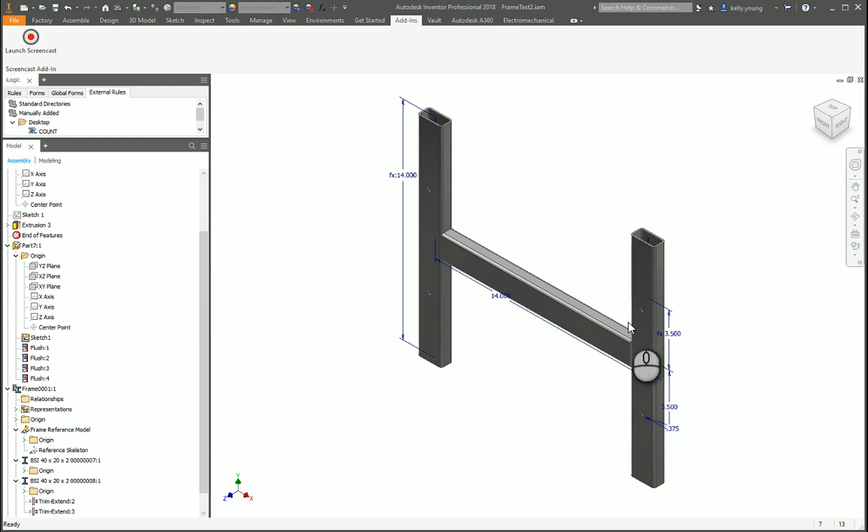So the question we have today is how to get the frame holes here to stick when we change the material from a different frame generator to a different style.

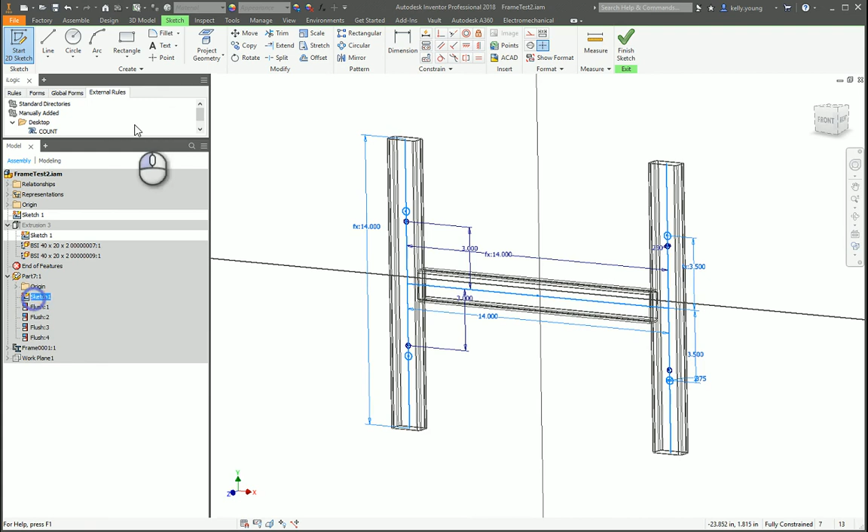First off, for the extrusions themselves, set up a sketch. Now, when you actually go into it and look at the wireframe, if you project the geometry of your sketch here... well, that's not working right there. Let's see.

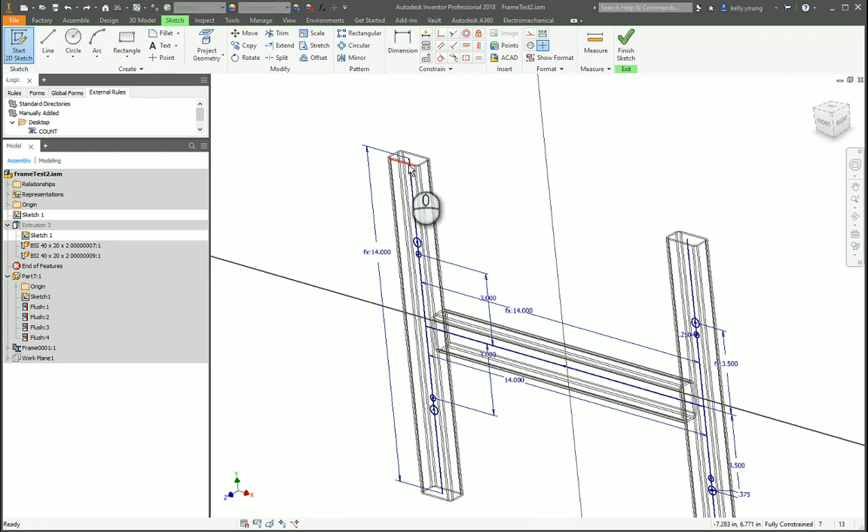There we go. It basically comes in as a locked part, not a projected part, because it doesn't really come through like that. So what I did is I drew a line that basically covers the exact same shape and set this dimension to a linked parameter to that part 7 here.

So that way, whenever it changes, this will change. That way we can attach our holes that we want to it.

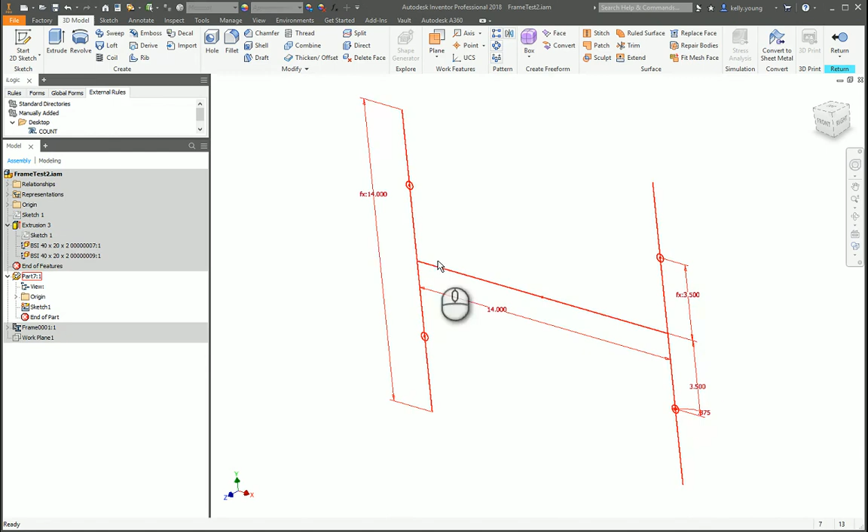So if you actually look at part 7, I was trying this earlier to see if these could come through, and they did not. So we'll just go ahead and actually delete these out.

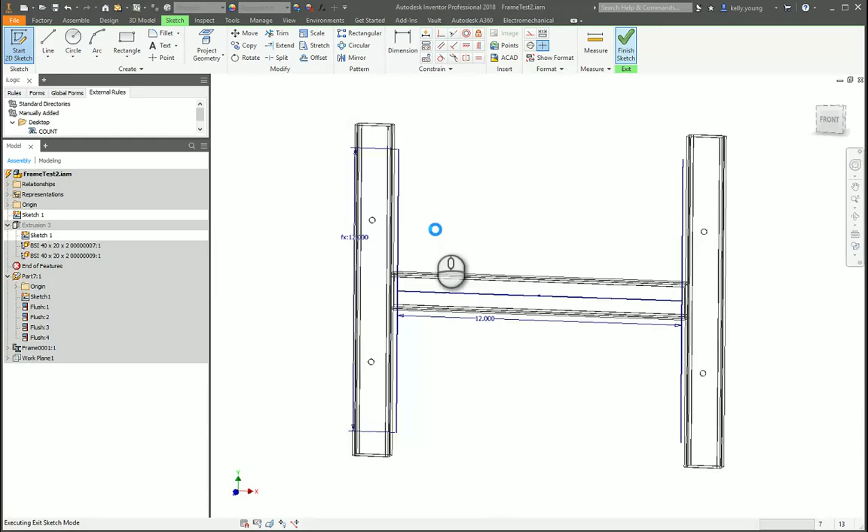So these are linked to this dimension. Rebuild all.

And the hole sticks. So make that shorter. The holes will stay there.

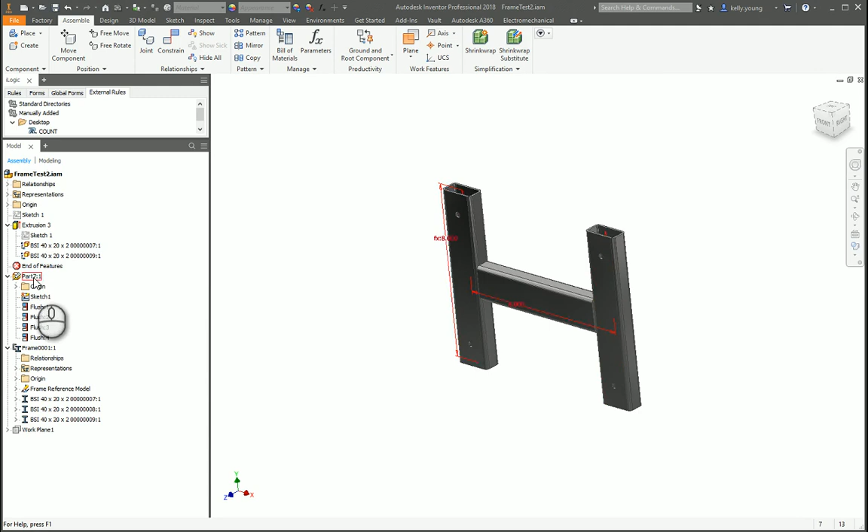Okay, so let's go back here. Let's make it a little bigger.

Okay, so if we come into the frame, there's our generator.

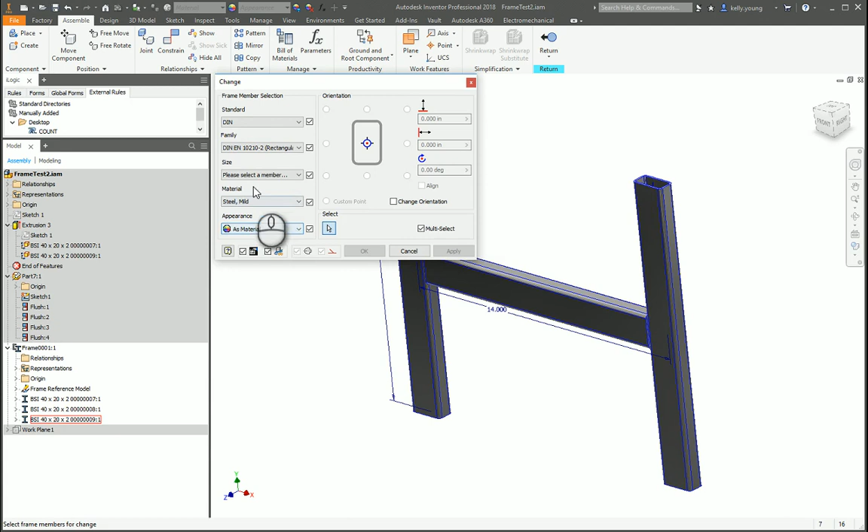Okay, so basically it says you're going to generate two new parts, and the trim to face goes away, and our holes go away. So, actually look at this.

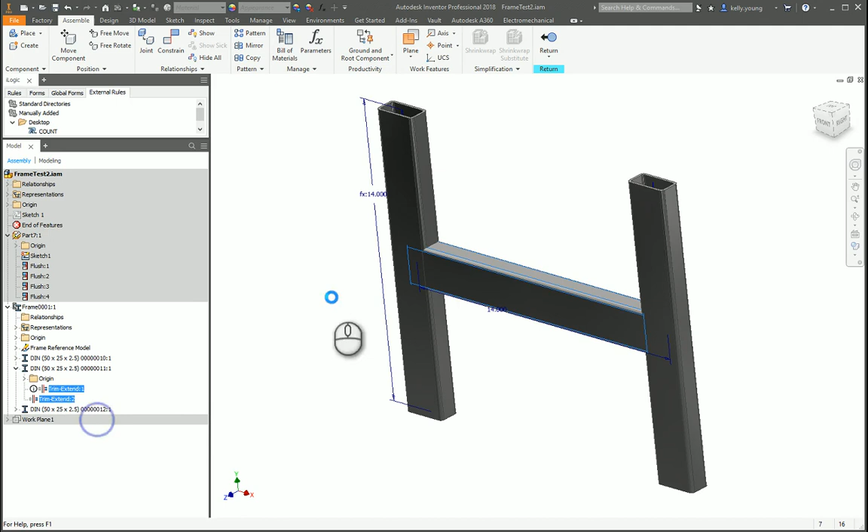It doesn't like it in general. So, delete those. Come back in, set them back up.

Now, our holes did not stick, but they are still here. So if we wanted to...

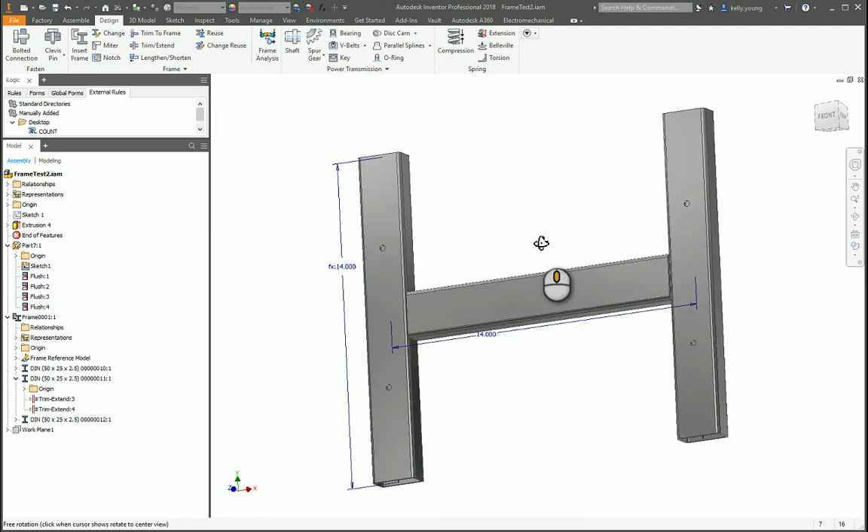bring them back in. Now, the reason they come back in is that the sketch is based off of the origin plane, not the actual face, because otherwise it would become disassociated, and you'd have to redefine it when you come back in. So if you're just redefining it from the actual sketch here and have this linked by the parameters there, then it will stick.

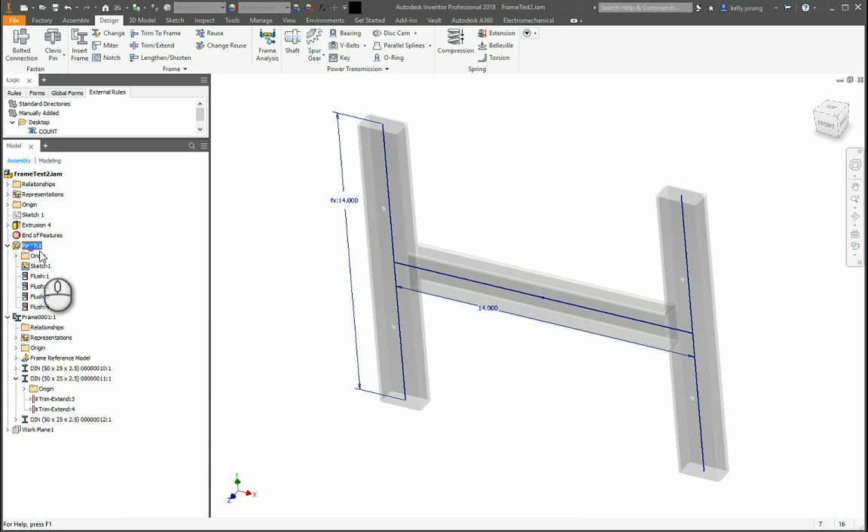So when you come back into here, you can change this again. Rebuild it and your hole sticks.

So that's an easier way of changing materials and having the holes stick, because the actual sketch for the holes will stay there. You'll just have to basically redo the extrusion, which isn't too bad, but the geometry actually stays. So hope that helps.